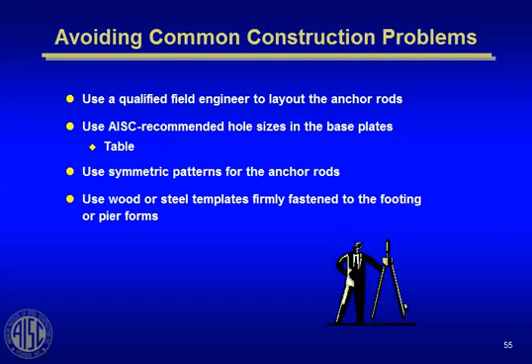The other available options, obviously, you can evaluate the need for the incorrectly located rods, and perhaps not all of them are required, and you can just cut some of them off and not even use them all.

You can cut the rods and use epoxy anchors. That's expensive and painful, but you can drill holes deep into the concrete with long drill bits and fill it full of epoxy and develop an anchor rod that way.

Make a larger hole and use plate washers. We've done that before. If it's only 1/4 of an inch off or 1/2 inch off, sometimes you can wallow out the hole in the base plate, make it come through, and then put a plate washer welded to the top of the base plate to get the hole back to its correct size.

You may have to throw away the old base plate and fabricate a new one that matches the incorrectly placed anchor rods, if that's possible.

Relocate the column on the base plate. That might work for a metal building or a warehouse where they can afford to move the column, but most architects frown upon the engineer asking to move the column.

You can bend the rods into position. If they're only a little bit off, sometimes you can apply heat to the anchor rod and bend it over enough to make it fit through the hole. That works, of course, if you only have a small error.

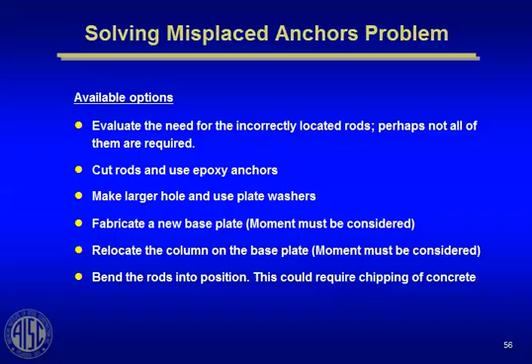You can provide a design with ample length so that if the rod gets pushed down into the concrete, it's still long enough to put a nut on it. So we like to specify extra extensions on the anchor rod so that if the guy pushes them down 6 inches, they still work.

If possible, do not use high-strength anchor rods. Use larger diameter rods that can be welded, because here's a situation where welding might come in handy, if you have to weld an extension onto the anchor rod or a sleeve. And of course, you can do that now in this new spec by specifying weldable grade 55, or of course A36, which are weldable.

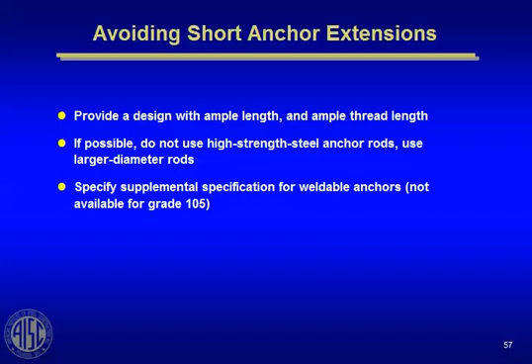Extend a short anchor rod by welding on a threaded extension. That's a possibility. Use a coupling nut to extend the rod. Cut the rods and use epoxy anchors, and these other solutions that we've kind of talked about.

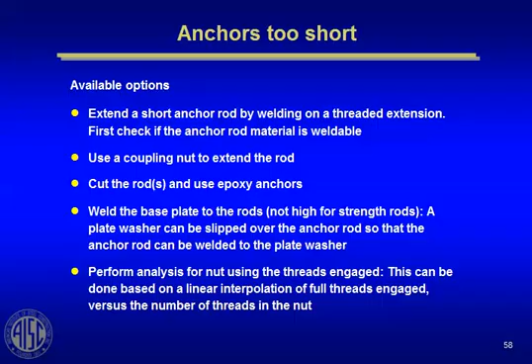Okay, coming to the end here. Any questions about column bases? Yes, sir.

My question is about the shear friction at the column base plate, and in relation to the oversized holes that are typically to be provided based on the practice, how have you rationalized how the base behaves, particularly if there's very thick plate material for the base plate?

Very good question, that's why I asked it. The way we have handled that is to specify post-grouting of the hole with a very high-strength grout so that you fill that contact space and then therefore validate the shear friction concept. That's the way we would do that.

Any other questions? Okay, we're getting tired, huh? All right, we're getting close to the end here. I want to spend just a few minutes talking about steel trusses.

Steel trusses is another one of those elements that you don't really learn a whole lot about in school. So we do a lot of trusses, both in our long span building practice, but also in buildings where you have transfer trusses. Sometimes when you're spanning 150 feet, a plate girder doesn't work very well, and you get into a shallow truss.

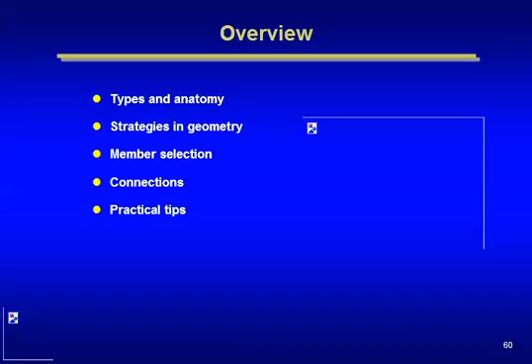So we're going to talk about the various types and anatomy of trusses, strategies in geometry, member selection, connections, and some practical tips. Most of this is not anything very new to you.

It's sort of obvious. A truss is nothing more than a form of a beam where you have shear and flexural stresses that you have to resist. The shear forces are taken by the diagonals and the posts. The posts, in this case, act in compression.

These diagonals are acting in tension. And then the flexural stresses in this beam-type member are taken by chord forces, compression stress in the top chord, tension stress in the bottom chord. So the truss is nothing more than a form of a beam.

Because it's a beam, you can draw a shear diagram and a moment diagram, and you can use the shear diagram to proportion the diagonals and the posts, and you can use the moment diagram to proportion the chords. Very simple concept of how a truss works.

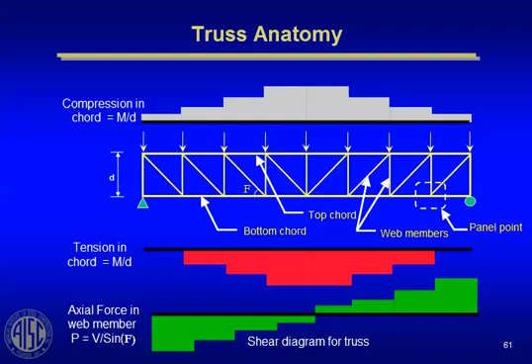This is what we call the truss panel point, and the question that frequently comes up is, how do you proportion the panel points of the truss? What are some of the rules? Before we get into that, though, let's talk about the various kinds of trusses.

And every single one of these you'll probably use sometime in your career if you work with architects who like to have all kinds of shaped roofs. So there's the king post truss, which we've used a lot of, the fink truss, the scissors truss, the bowstring truss. And recently we did another one that we came to call the Brunel truss.

A Brunel truss is a truss that basically acts like a catenary. The bottom chord is curved, just like the top of that bowstring. The top of the truss is also curved, just like that bowstring. The top takes compression. The bottom takes pure tension.

The tension is constant along the span at the bottom. Compression is constant along the span at the top. And the only thing you need is posts between the tension catenary and the compression member at the top, at least theoretically under uniform load.

It's a little more hairy if you have unbalanced loads, and there you start to develop shear in that truss, but that shear force is taken by the top and bottom chord.

A Brunel truss, the word Brunel came from a bridge engineer in England, in the UK, who designed a teardrop-shaped truss spanning across as a railroad bridge. His name was Isambard Kingdom Brunel, so that's how the word Brunel truss came along.

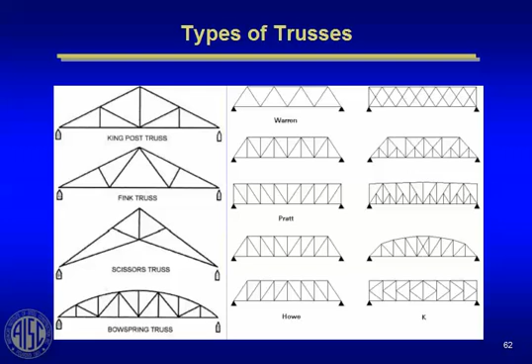Anyway, there's all kinds of forms of trusses. They all basically have shear carrying elements and flexural carrying elements: tension and compression for the flexural members, and then tension and compression for the diagonals and the posts.

There's an optimum range of economy for a truss in proportion to its span. If the depth is too small, you have large chord forces, because the chord force is nothing more than the moment diagram divided by the depth of the truss. So M over D - if D is small, then M over D, which is the chord force, gets to be very large.

If the truss gets too deep, you're kind of shooting yourself in the foot. You're reducing your chord forces, but now you're making your shear members much longer, and so you start spending all your material and money into the shear elements like the diagonals and the posts. So obviously there's an optimum range in there.

Interestingly enough, if you ever do a cost parametric study on optimizing the depth of a truss, you find out that the cost curve is kind of flat. In other words, there's a range of depth where it really doesn't change very much. That usually works out to be 1/10 to 1/12 the depth of the span. If you make it 1/8, you're probably spending a little bit more money. If you make it 1/14, you're probably spending more money. But 10 to 12 is generally, for most trusses, that economical range.

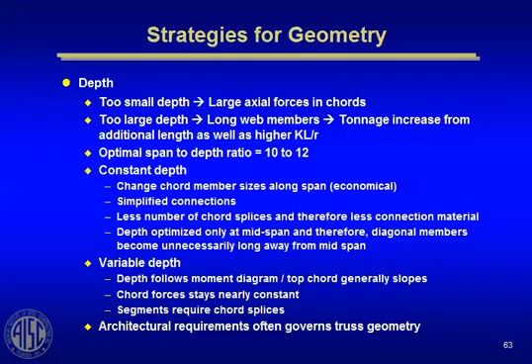Panel point spacing is primarily governed by the location of the loads that frame into the truss. Generally, when you design a truss, you want to keep bending off of the top chord or the bottom chord, because then the chord, instead of acting like a column with axial load only, it acts like a beam column.

You put bending in that beam column and you're going to spend a lot more money. So generally you want to bring the loads into the truss at the panel points, even if you have to subdivide the panel points to make that happen. I'll show you a picture of that in a minute.

Try to avoid at all costs putting uniform loads on the top chords of trusses, because that's very expensive. Those already have heavy compression forces in it. Now you're adding big moments in there as well. You're going to make your truss a lot heavier and also make the connection more complicated. So panel points are generally dictated by the spacing of the members that frame into them.

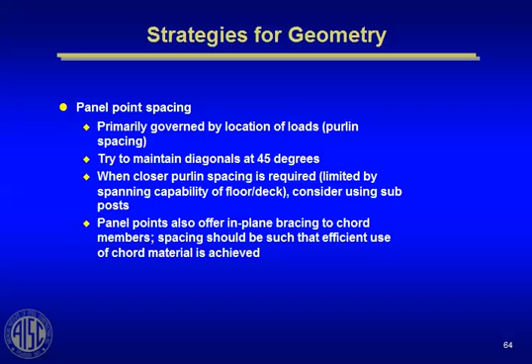Keep your focus on the connection while selecting the member types. Many times I've seen engineers in our office design trusses. They sketch up what they think the truss wants to look like. They assume an orientation of the member. They form their computer model, input the model, put the forces in, get the member sizes out.

They think they're done. Then they go sketching up a connection detail, and they say, oh wow, this doesn't look too good. If I'd only turned this member the other way, or if I'd only done this, or if I'd only done that, this connection would be a lot easier.

Guess what? The moral of that story is sketch up the connection first, then go do the analysis to proportion the member sizes. You'll find that you'll save yourself a lot of time at the end of the day if you conceptualize the connections first, then go in and proportion the truss and determine its member sizes.

Generally, secondary moments—if you do have some secondary bending in the top chord of a truss—you can ignore that and design that truss as if it were pin connected at the ends of all the members, designing only for the axial forces. Those secondary moments have been shown not to be significant in the ultimate load carrying capacity of the truss. So most trusses you design as pin connected members.

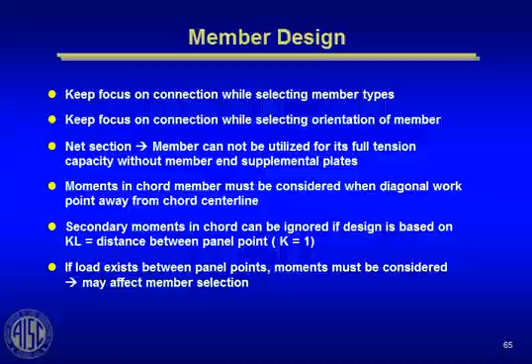Connections are what it's all about when you talk about trusses and costs. The simplest kind of truss you can do is a double angle top chord and a double angle or single angle post and web members like you've shown here. We have a single gusset plate. The angles can either be shop welded or field bolted depending on the size of the truss.

Remember, you can't ship a truss over the highway that's much deeper than about 13 feet, maybe as high as 16 feet if you get a special permit. So our rule is if we can make our truss 16 feet deep or less, we make all of our joints shop welded—do all that welding in the shop, ship it out in one piece, then only use a bolted splice every 60 feet or 120 feet, depending on how long you want to ship it.

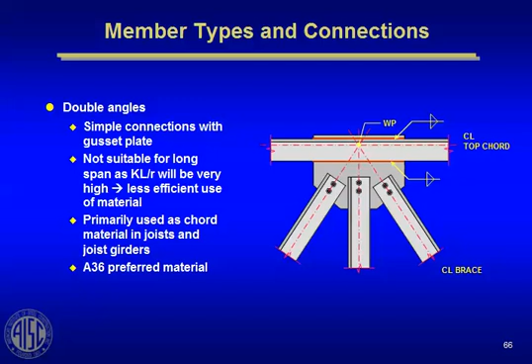If it's 20 feet or 24 feet, then you're pretty much stuck with field bolting the connections. You have the option of field welding the connections too, but we don't like to do heavy field welding out in the field unless you have an inspector there, because field welding is problematic—you're out in the wind and the rain and the elements, and sometimes the welding isn't so easy. So we like to do shop welding, field bolting whenever possible.

Whenever you can, use double angles or T sections. If you can, make the T's deep enough where the web members can bolt or weld directly to the T stem—that saves the cost of that extra gusset plate. So you might try that. The disadvantage is if you use a real slender deep T, you're going to get into that H over T problem we talked about earlier, and you'll have to design that T as a slender compression element because it's going to have compression in it.

So there's a trade-off there. If you get it too slender, you've got to go into the slender member provisions of Chapter E.

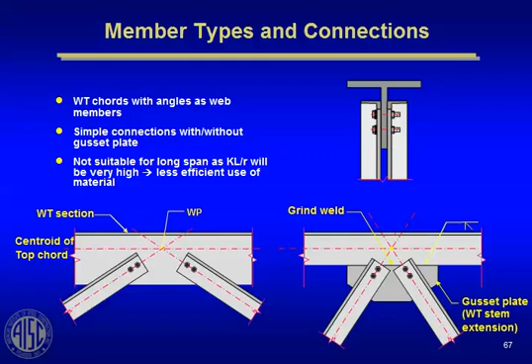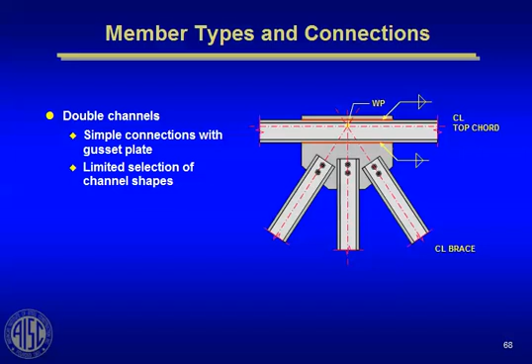Sometimes instead of double angles, we've used double channels as top chord members. Again, keeping one single gusset plate if you can until the forces get too big. Then you may have to go to either a double gusset plate.

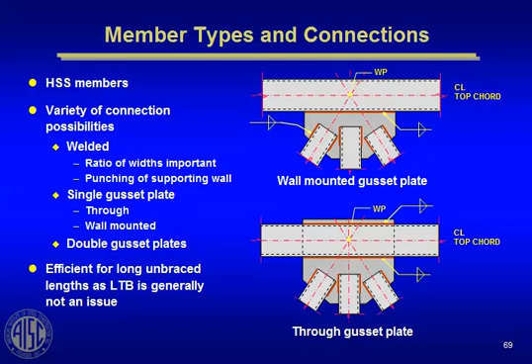Pipe trusses are oftentimes used with the same concept as we're showing here. This is the most expensive one - the one architects always love. That's obviously the most expensive, but these really aren't too bad, and I like pipes and

closed sections for compression members in trusses because they have long unbraced lengths. You're going to quickly learn that the proportioning of trusses and the weight of members is often controlled by the amount of axial load you can carry for the given unbraced length. You want as long of unbraced lengths as you can without sacrificing too much buckling capacity. In other words, to use the steel, you want to stress it up as high as you can toward the yield strength, but if you get the member too long, you'll take that buckling resistance hit.

So tube members are great to get long unbraced lengths.

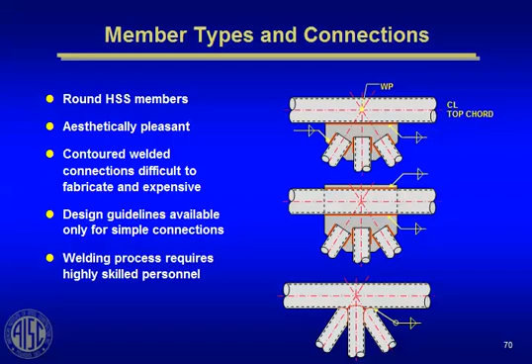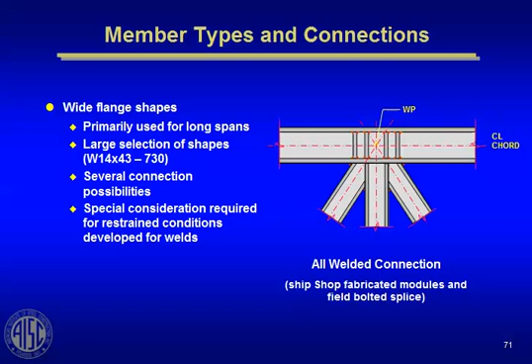Sometimes if you're shop welding a truss, you may want to do a shop weld like this with a wide flange turned with the web vertical. Field or shop cut all these members and weld them into place. Again, I might consider doing this only if the truss were 16 feet deep or less where you can ship it over the highway. Obviously, you'd never want to do this in the field - you'd be crazy to do a welded joint like that in the field.

When you start getting big, heavy trusses, you may be stuck with double gusset plates, one on each side. This is the standard truss connection for W14 or W16 or W12 shapes. Use this chord with a web horizontal, a double gusset plate, one on each side with bolted flanges. This is probably the bread and butter truss connection.

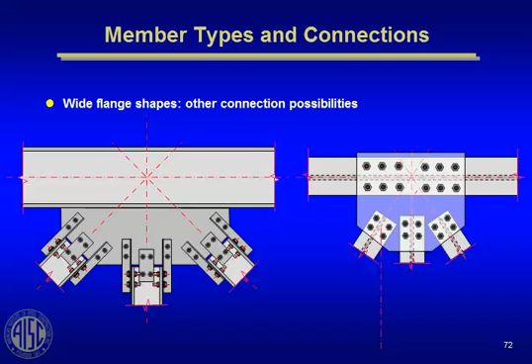Sometimes you can get away with turning the web of the wide flange vertical, one single gusset plate with wide flange posts and diagonals that have the so-called claw angles bolted from the member onto the gusset plate. Fabricators tend to like this one as well because it's only one gusset plate, but unfortunately it only works for what I would call medium to lightly loaded trusses. If you get really heavily loaded trusses, this isn't going to work very well, and you're going to need 2 gusset plates like we have over here. That's why this is the standard for heavy trusses.

So practical tips for truss designs, most of them we talked about. Always consider the connection design and the member selection design process first, not last. Engage the fabricator or erector in the design process. If you know who your fabricator is going to be, before you start the design, go have a meeting with them and say, hey, what is your shop practice? How do you like to do trusses?

And you want to have the erector at the meeting. So get the prejudices of the fabricator or erector early on in the project if you can, so that you'll get the best bid price. Try to use bolted connections and limit welding to the shop only where possible. For repetitive trusses, consider grouping member sizes. Additional tonnage may be offset by the savings in detailing and fabrication.

Document a detailed erection plan and assumptions made in your erection process. For long span roofs, some of the heaviest loads the roof will ever see are during construction, during erection. So the engineer should have a preconceived erection process in mind that he shows on the drawings as a suggested erection procedure to the fabricator erector team. If he wants to come back with an alternate, you can entertain that, but you ought to give him a way to do it that you know works.

Design and detail connections on the construction documents if possible. If not, clearly show the design forces, including all through forces for connections.

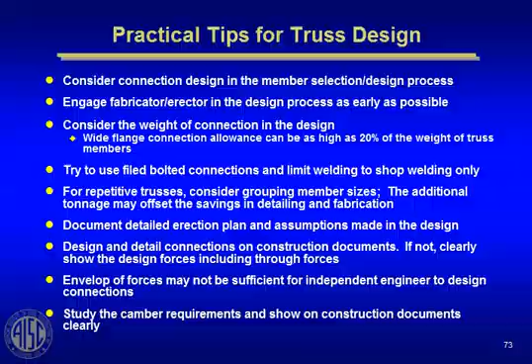Bracing members from the computer analysis may not be proper when the tolerances for out of straightness are not considered in the analytical model. When we design a 300-foot span truss, we build an out of straightness into the design process to model the P-delta effect, so we capture the secondary forces more accurately. You don't need to do that for normal buildings, but for long span construction you ought to analyze a model that's out of straightness, because it will end up that way whether you like it or not.

Consider using slip critical bolts and oversized holes to alleviate fit-up problems. I've seen it argued both ways. Some erectors like slip critical bolts with oversized holes; some fabricators say that's too expensive. So you've got to sit down with your fabricator-erector team, let them fight it out, and come to you with what they want to do. If not, you're forced to make a decision, and I've always found it better to go with oversized holes and slip critical joints, because that eliminates most of the need for field fixes or wallowing out holes in the field, which I don't like to do with long span trusses.

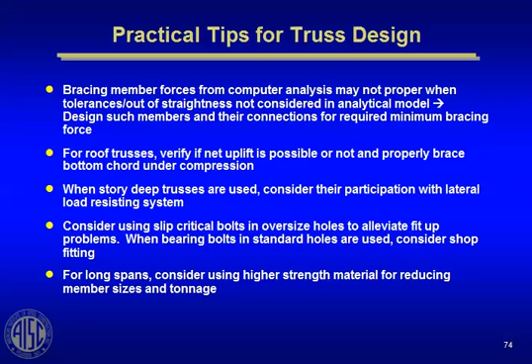For long spans, consider using higher strength material to reduce member sizes. We like to use grade 65 steel in our long span roof trusses because you can generally count on that higher yield strength in the design, and the cost of grade 65 material is anywhere from 0 to 3% more than grade 50 — you almost get that extra strength for free. The only disadvantage is it has to come from overseas with Arcelor, formerly known by another name, so there's a bit of a shipping delay, a potential delay in the project. But if you mill order the steel, you probably have time to do it. I think you'll save some money using grade 65 steel in long span truss design.

Okay, let me close this next section in just 5 or 10 minutes. We'll talk about computer modeling and verification. But before that, any questions about trusses anybody would like to ask? Yes, sir.

The question was whether I'm familiar with the Miller Park collapse of the Big Blue crane. I'm generally familiar with what happened. I think it was a combination of things, but where's your question headed here? I think some of the expert witnesses involved in that case were wind tunnel people — the two leading wind tunnel experts of North America served on opposing sides. The story I got, and it was finally settled out of court, was that the primary cause was operating that crane outside the acceptable wind conditions. In other words, wind load played a major effect on that crane losing its load.

Okay, how are we doing here? Yeah, no, this will go real fast here.

Computer modeling and verification. We always try to get engineers to, number one, look at the deflected shape from the computer model and be sure it makes sense. Go back and check the input data and be sure it's consistent with the output data. How many times have I seen us design grade 50 steel on the contract documents only to find it was A36 steel in the analysis, or vice versa — you want the drawings to match what you used in the analysis. Doing simple checks of the computer model, looking at deflected shapes and mode shapes, is one very powerful way to be sure your model is correct. Another way is to look at the force distribution in the members — the axial loads and moments — check the boundary conditions, and do some quick hand calculations to be sure the computer model gives an answer reasonably close to your back-of-the-envelope statics check. So just doing some simple things can help you check yourself against your complex computer model.

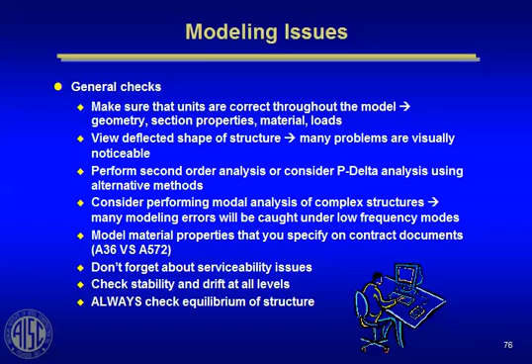If you turn on the first order analysis and you get a deflection of 10 inches, and you do a second order analysis and it's 20 inches, that means you've got a P-delta effect that's 100%, and that's way too much. You have a soft structure that's potentially unstable. So that's another trick to check in your model: compare first order analysis and second order analysis.

Always look at the boundary conditions. I'm going to let you peruse these on your own. Let me pick out one here. In a lot of our long span roof design, we sometimes use pot bearings where you want one end of a truss to slide, or one end of a beam to slide. And that all works good, and the assumption you make in the model is that that's a frictionless surface and that there's no force buildup.

Well, remember that you can't buy any kind of frictionless roller or Teflon pad with less than about a 5% coefficient of friction. So if you're pulling on a truss, for instance, with a pretty large axial force, you'll put 5% of the reaction as a horizontal load on that support before it overcomes the friction and actually slides.

Now, that doesn't make a difference if you have a beam with 10 kips on it - 5% of 10 kips is nothing. But 5% of 5,000 kips on top of a shear wall or a column is a lot of load. So you want to always consider that so-called shear friction force in your design. Many engineers forget to do that, and they end up with a support that cracks, or additional lateral load they never realized they had. So that's what this one is all about.